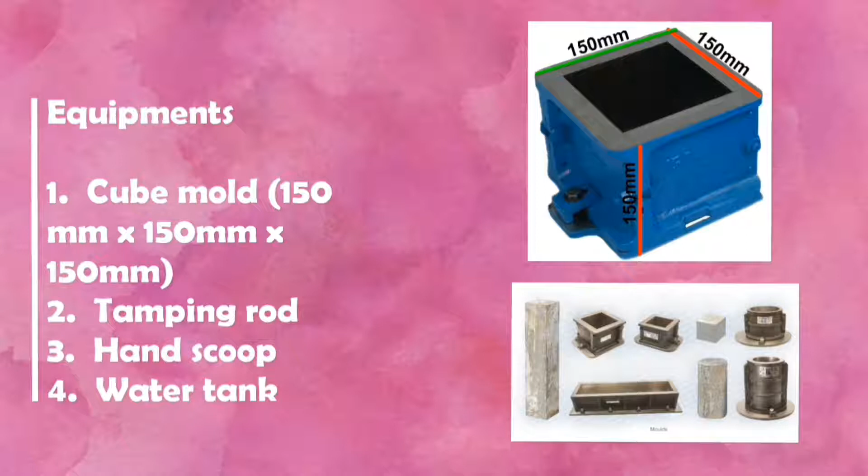Material and equipment. Materials that we will use are cement, fine aggregate, coarse aggregate, and water. Water must be clean enough to drink. There are various types and sizes of mold. In this test, we will use 150 x 150 x 150 mm, and then tamping rod, hand scoop, and water tank.

Procedure: mixing the concrete by hand and then concrete cube test. First of all, we need to determine the mixture of concrete. For explanation, you can watch my next video in slump test. Then we need to place fine aggregate and cement on a base and mix together.

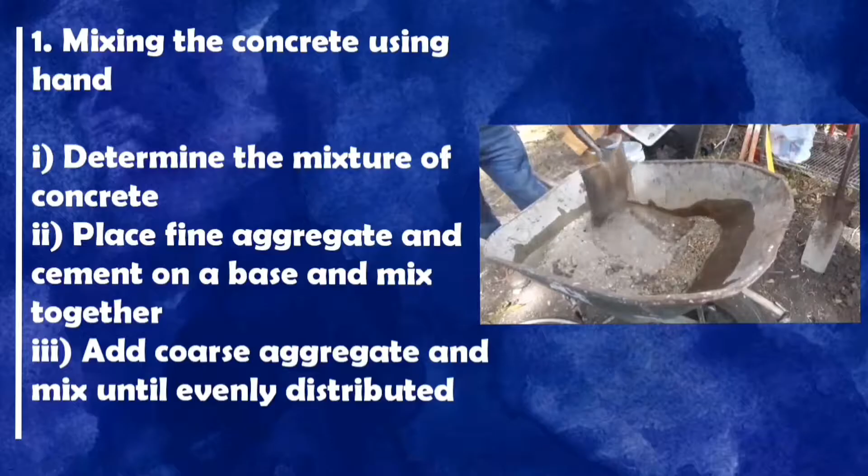Add coarse aggregate and mix until evenly distributed. Add water and mix until the mixture is consistent. If you are satisfied with your mixture, proceed to do a slump test to ensure the water is not too much. After slump test, proceed to the casting and curing.

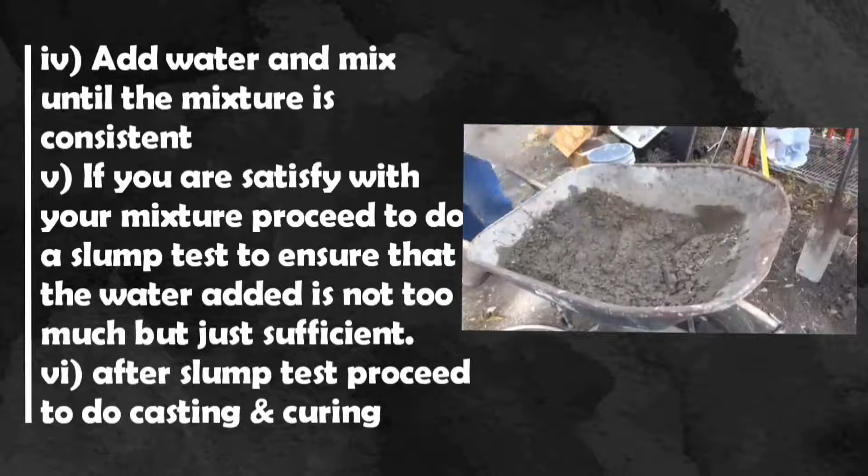Concrete test cube: cleaning and fixing, placing, compacting and finishing. Last is curing. First of all is cleaning and fixing. Make sure we use a suitable mold. Apply a light coat of proprietary mold oil on the internal face of the mold. Fix the cube mold with base plate tightly.

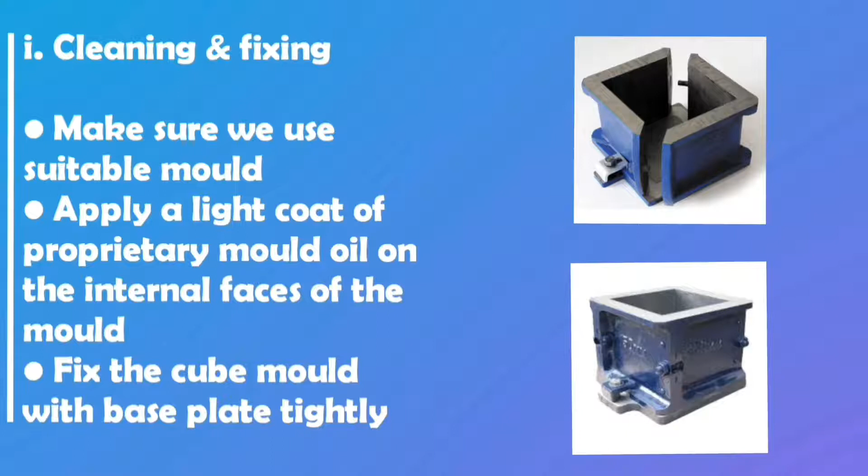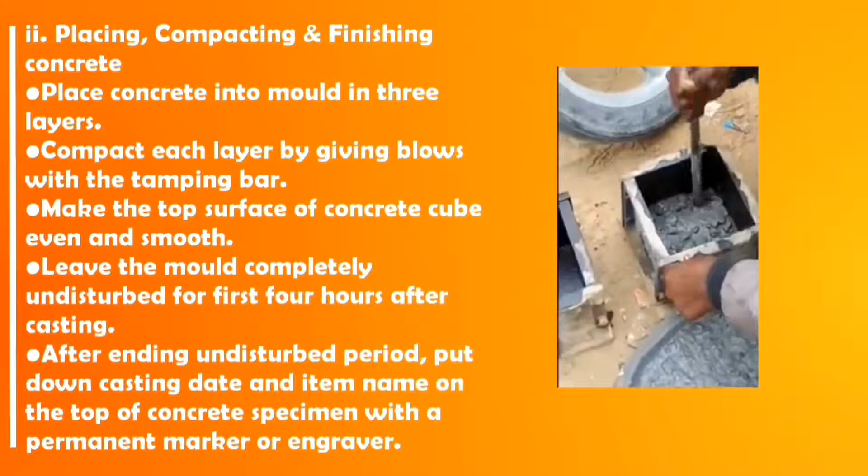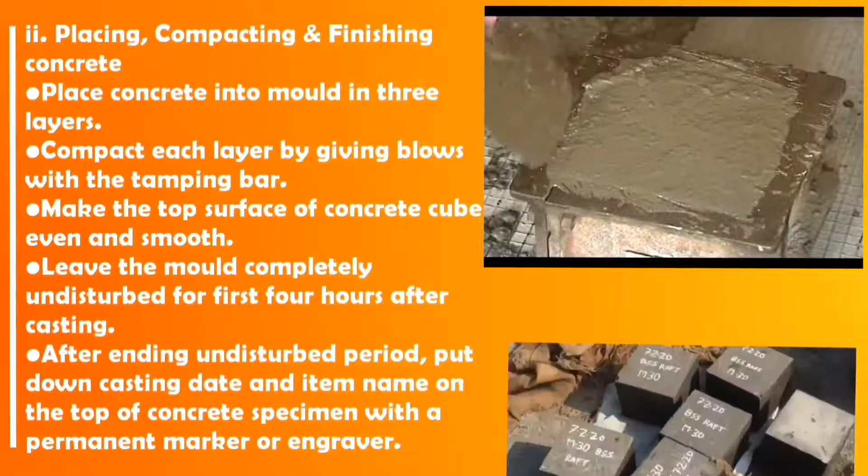Then, placing, compacting and finishing concrete. Place concrete into mold in 3 layers. Compact each layer by blows with the tamping bar. Make the top surface of the concrete cube even and smooth. Leave the mold completely undisturbed for the first four hours after casting. After the undisturbed period, put down the casting date and item name on top of the concrete specimen with a permanent marker.

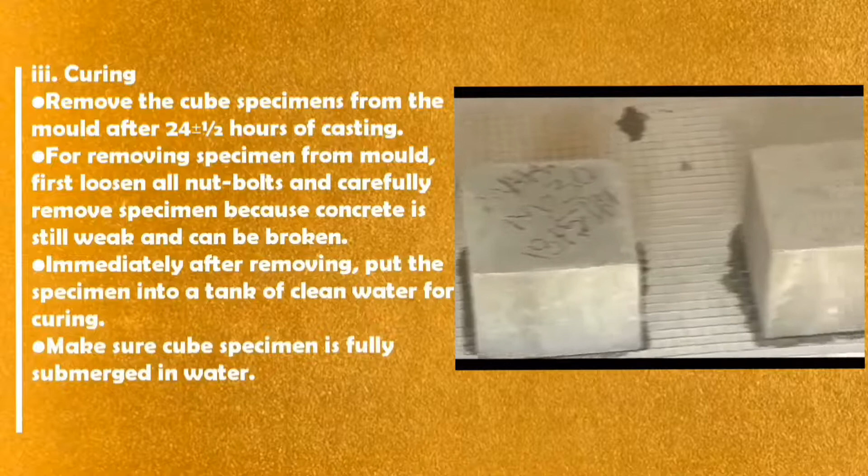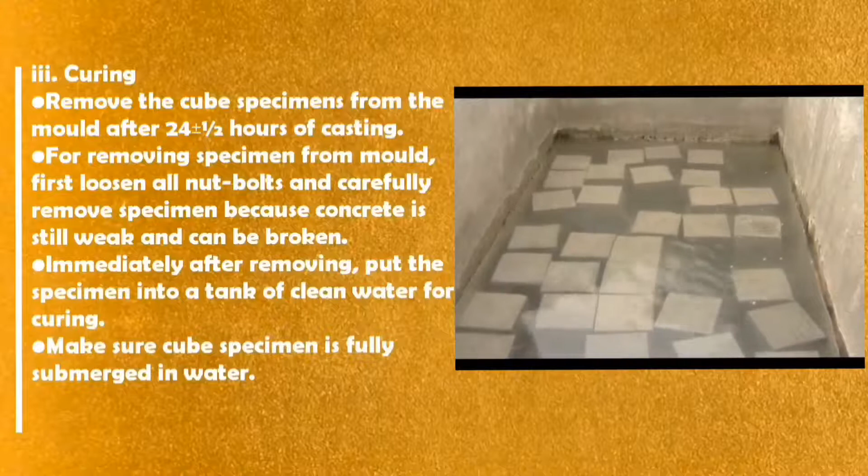Lastly, curing. Remove the cube specimen from the mold after 24 hours of casting. For removing the specimen from the mold, first loosen all nuts and bolts, and carefully remove the specimen because concrete is still weak and can be broken. Immediately after removing, put the specimen into a tank of clean water for curing. Make sure the cube specimen is fully submerged in water.

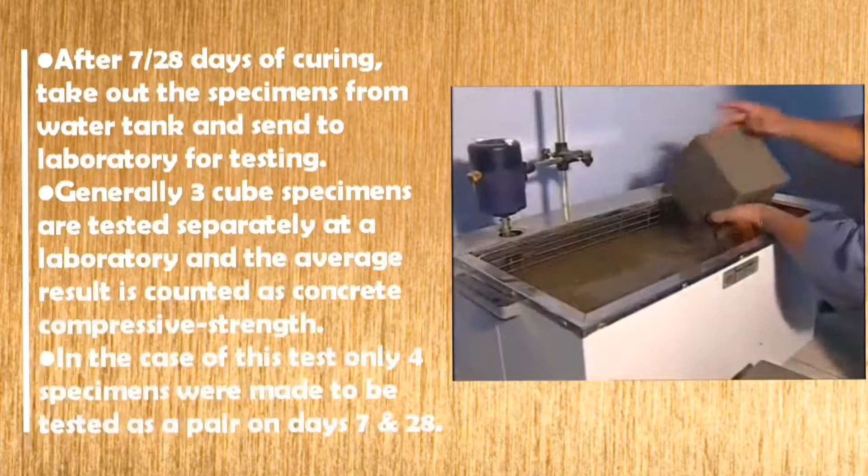After 7 and 28 days of curing, take out the specimen from the water tank and send it to the laboratory for testing. Generally, 3 cube specimens are tested separately at a laboratory and the average result is counted as the concrete compressive strength.

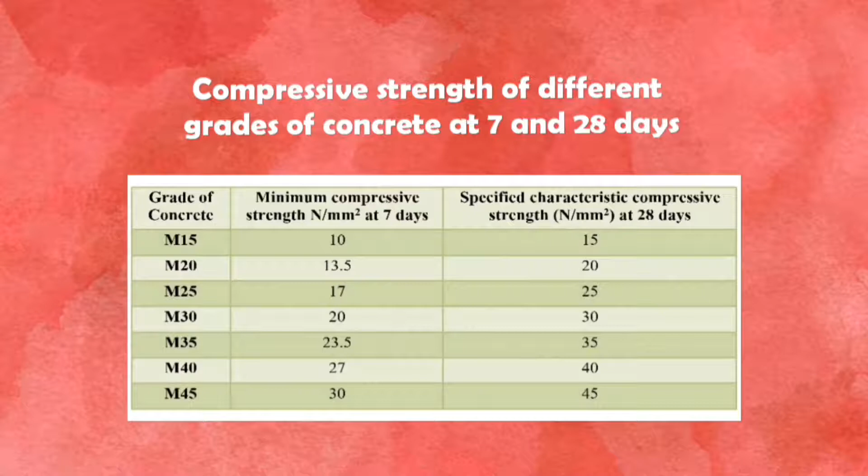Result. This is a sample of the result after we do a compression test. For other explanation, you can watch another video in compression test video.

Safety and precaution. We need to wear normal safety PPE like safety boots, wear protective gloves, and make sure the cube mold is fixed correctly and ensure all nuts are tightened.

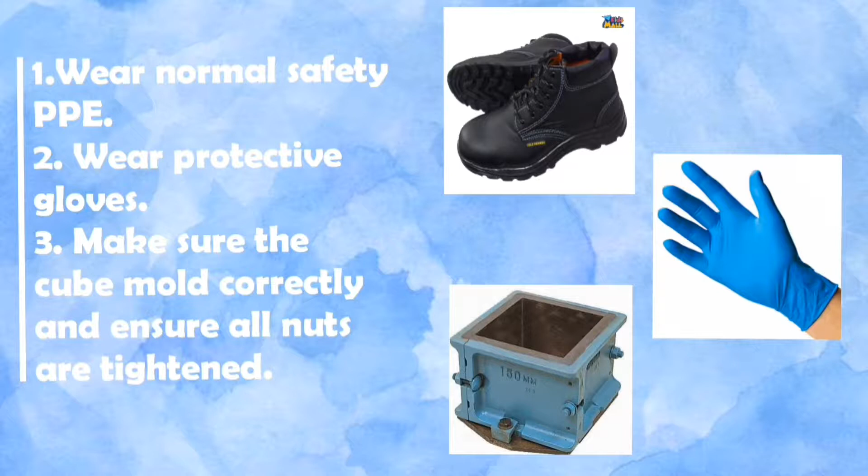Conclusion. The longer the curing process, the more the compressive strength increases. Reference.